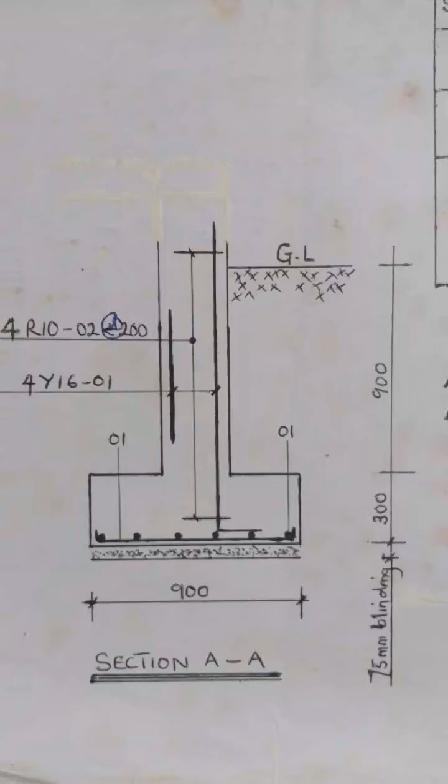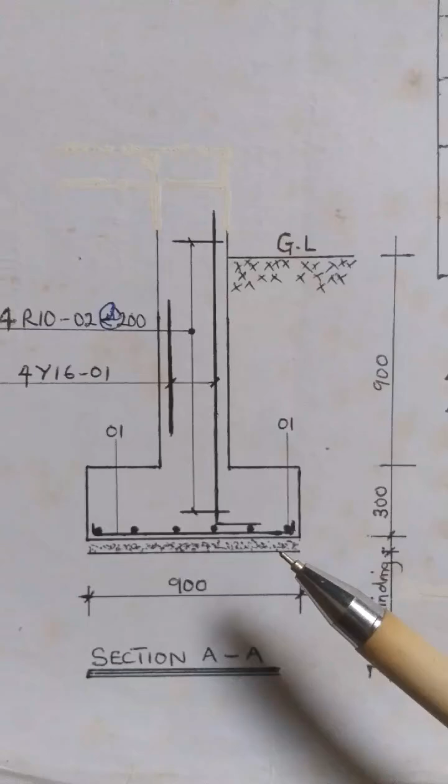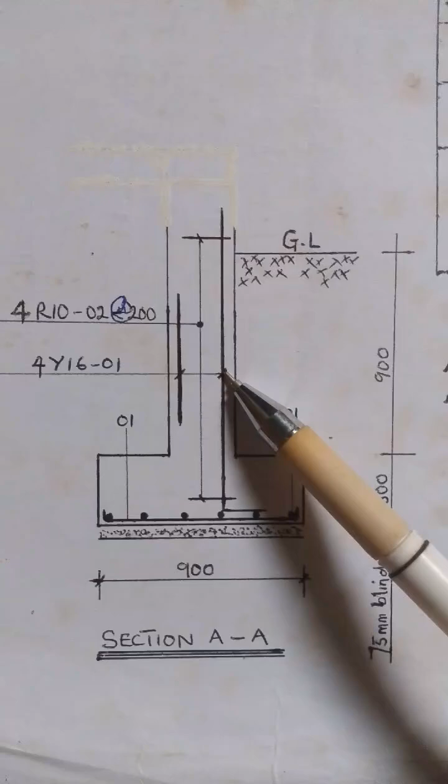We are still talking about the bar bending schedule. This is a typical section of a base, a column base. Now we have the base as 900. We talked about the base in the previous video, but today we are going to talk about the column. You can see that the column here is made up of four lengths. We have it this and this. You can see the indicator showing that this information is made for this and this. So that is what we are looking at today, for the column.

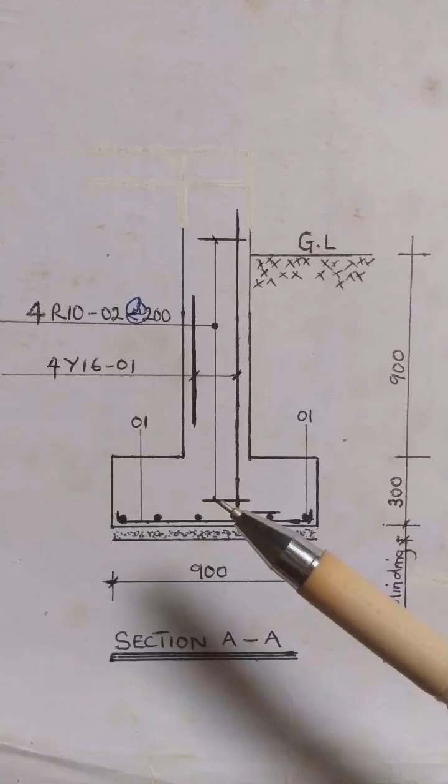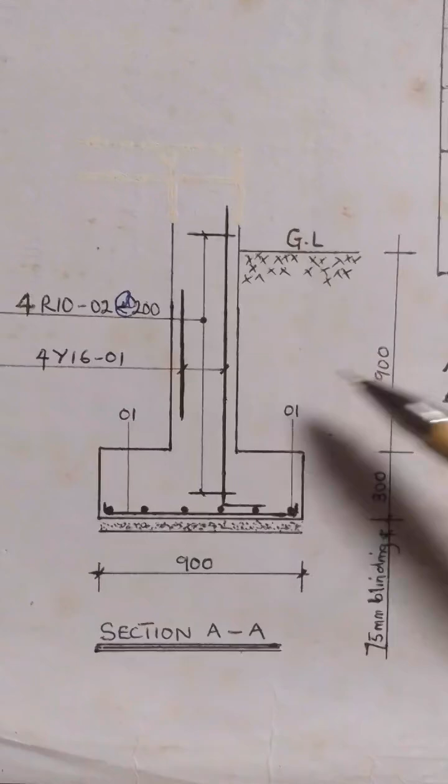Now the column also has stirrups. It is the stirrup that holds the main bars in place. The stirrup in this case is what we refer to as lateral ties. The lateral ties span from this point to this point. So from here we have four pieces of lateral ties that will span this length at 200 millimeter spacing.

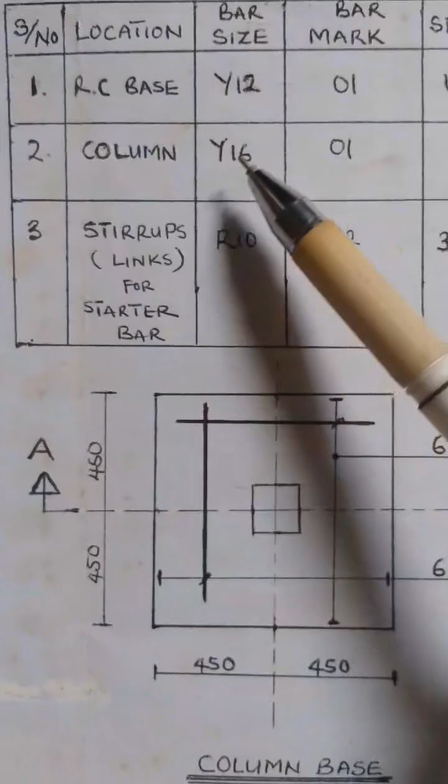So for the column now, we are looking at the main bar and the lateral ties. When you come to the schedule now, you have the column. We have the column as Y16, bar mark O1. We don't have spacing for the main bar. Then this is how the reinforcement looks like.

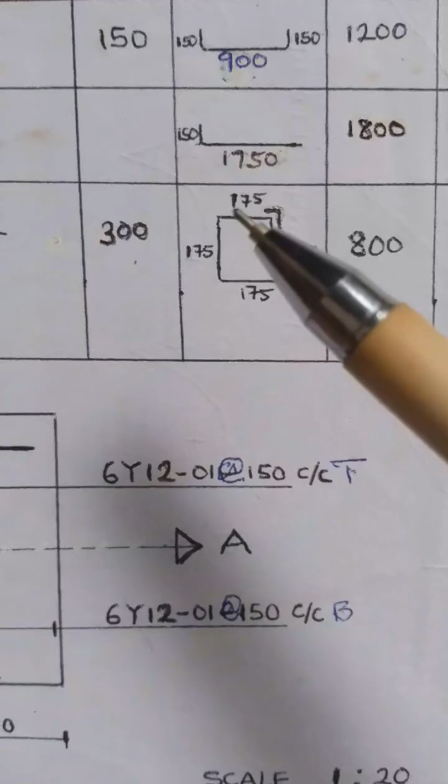From the total height of that base, we made some subtraction because of the reinforcement for the base. Then we arrive at 175. So that is what you are going to get from this point to this point.

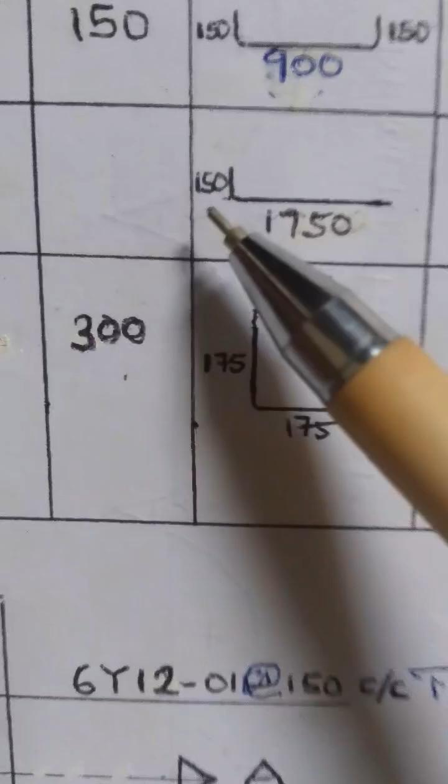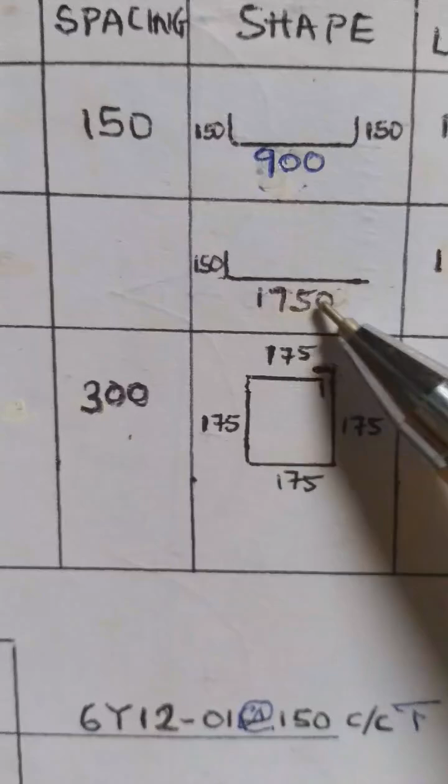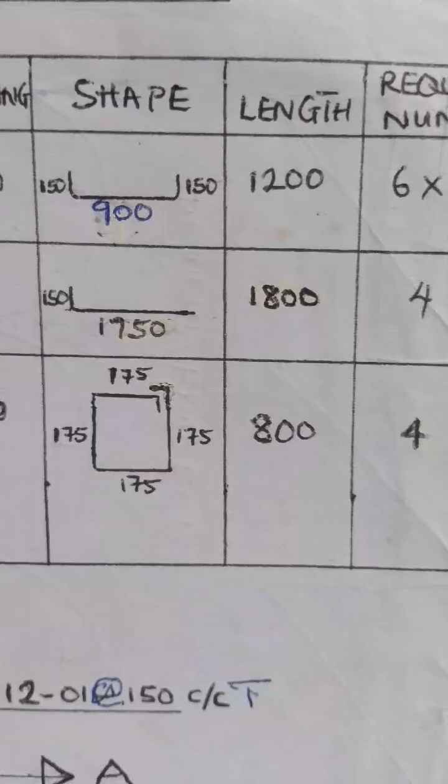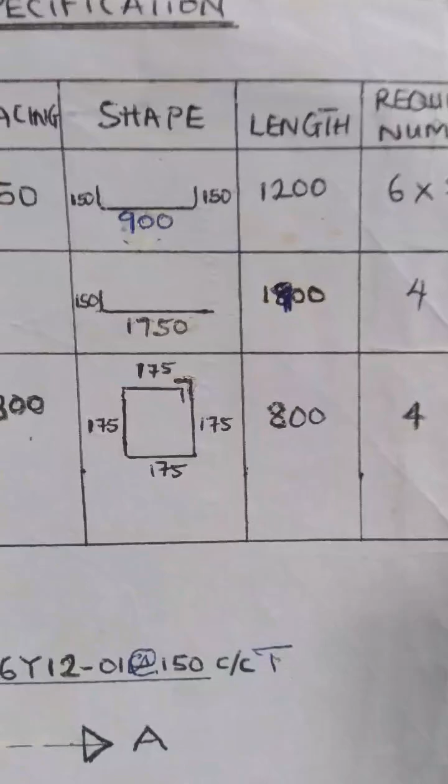Then you also have a 150 bend. In most cases we usually have up to 225 length of the legs, but in this case we are using 1750 plus 150. It will give you... this is supposed to be 1900. Okay, 1900. Then you are expected to have four lengths of it.

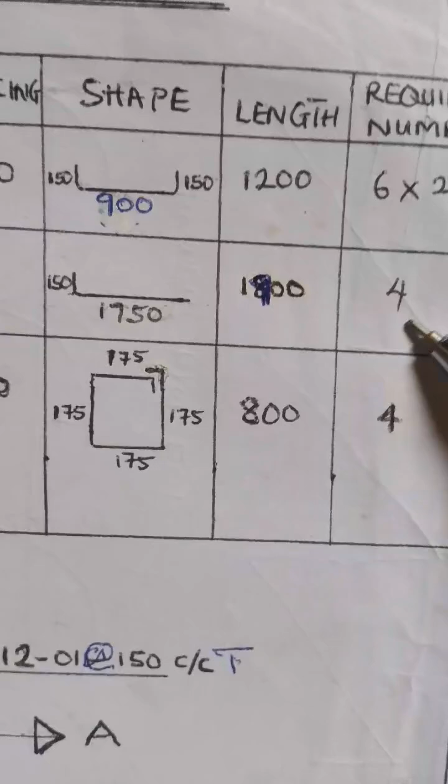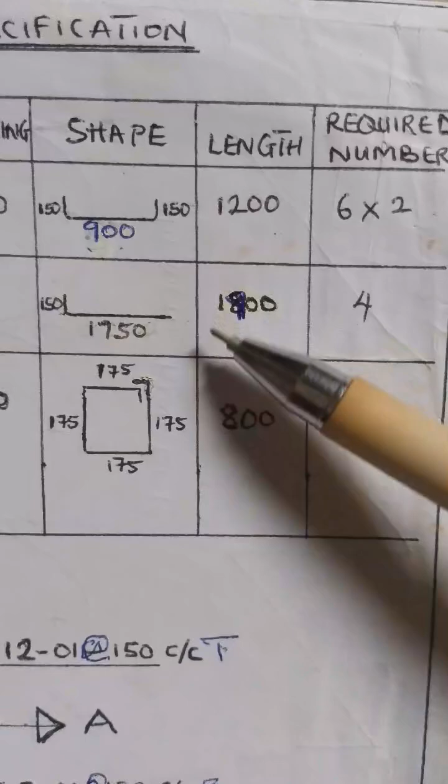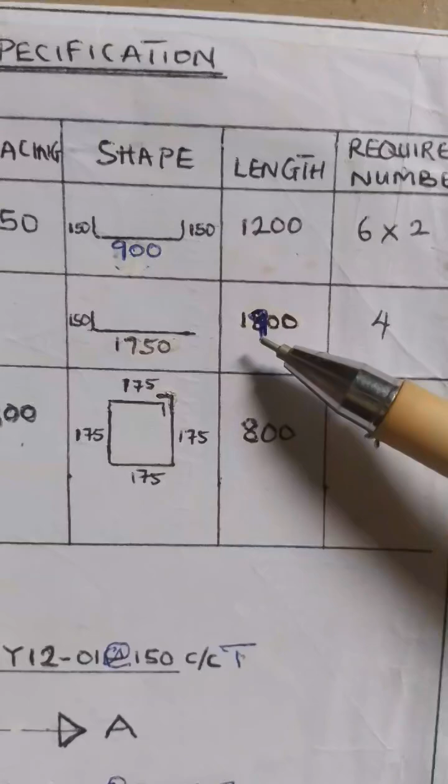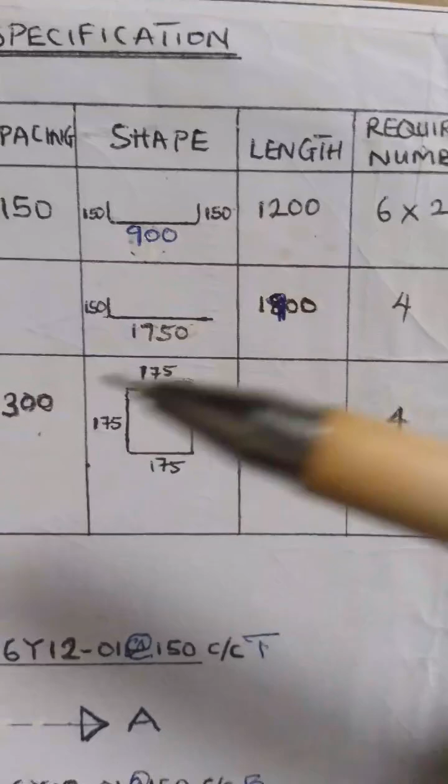That will make up that column, so you have four lengths of it. With this information, the iron bender will only get the reinforcement of Y12 and cut 1900 millimeter length into four. So that is what is expected to provide here before he will start bending, to bend this 150. This will actually aid the steel fitter on how to cut, the length to cut, and also the bend to be made. So that is for the column.

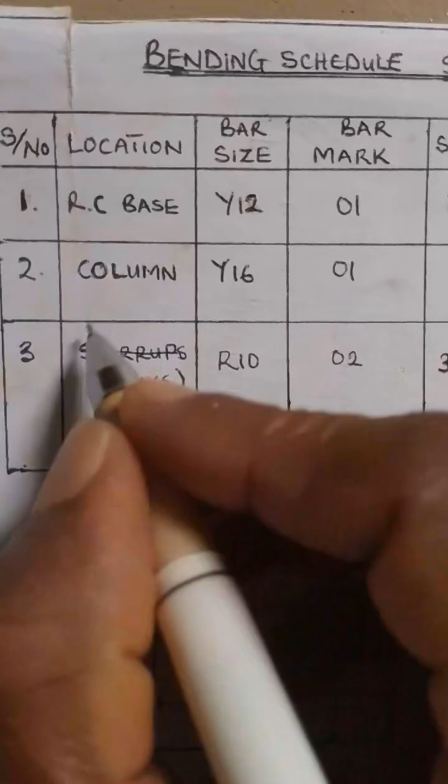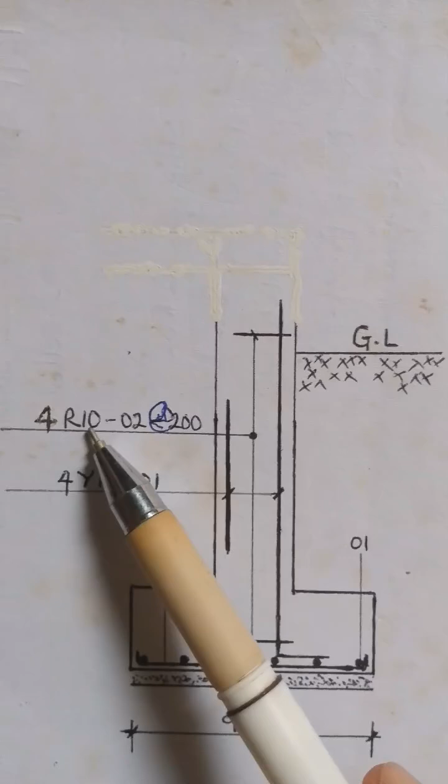Then we come to the links, the lateral ties. From the lateral ties now, we have 4 R10. Remember I told you this R is for mild steel, while the Y is for high yield steel. So the lateral ties, we are using mild steel. So 4 mild steel, diameter 10, O2 at 200. Why is it O2? Though they are all in the column, but of different size and of different length, so that is why the bar mark will change. The spacing is 200.

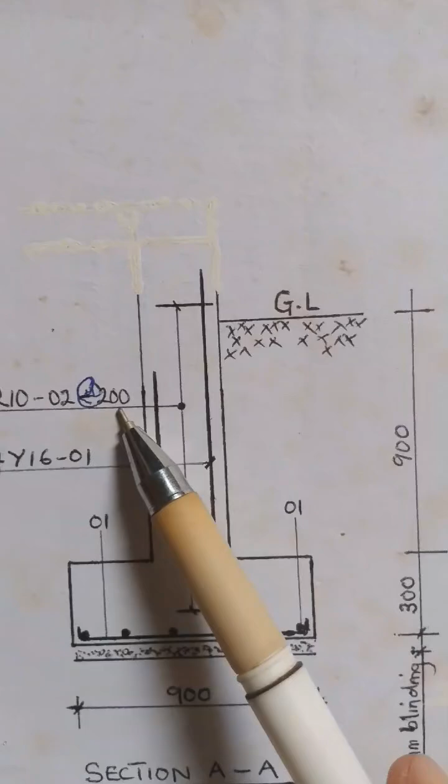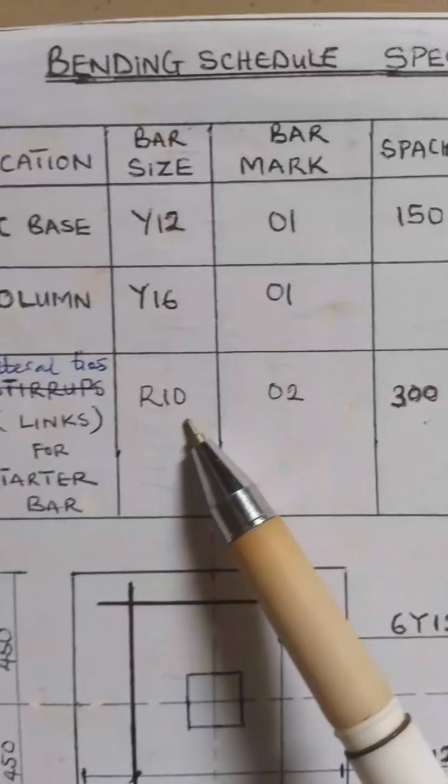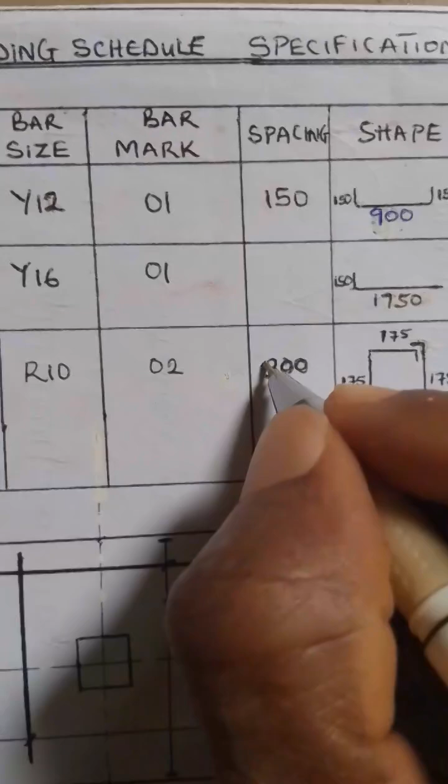So you come to the schedule. We have lateral ties here. The bar size is R10, the bar mark is O2, the spacing is 200. Then we have this length of the lateral ties.

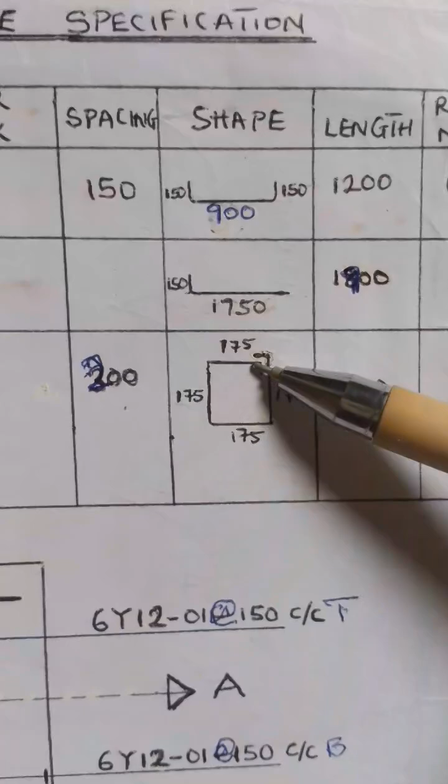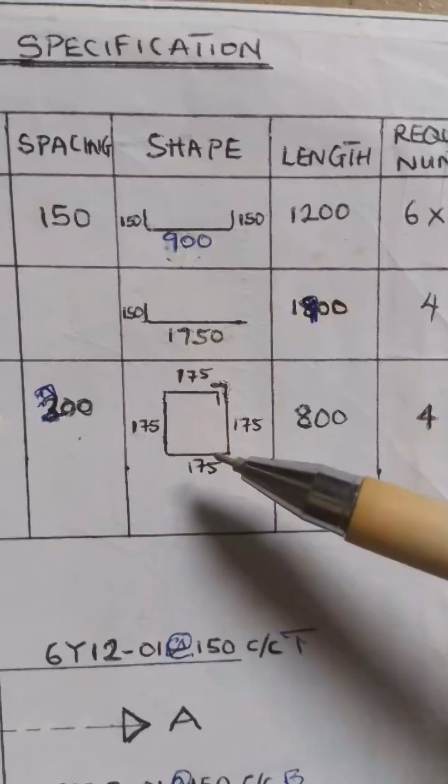So when you add up the four sides and also the bend, you have 800 as the overall length. So this 800 is what the steel fitter is expected to cut before it can now bend to get this shape. It's expected to produce 4 of it, which is this 4 here. So that is how we're expected to translate this information of our reinforcement into our bar bending schedule.

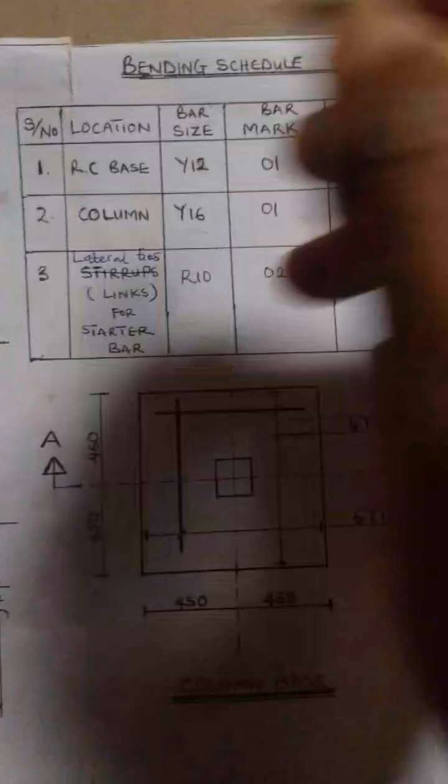Okay, this is bar bending schedule. All right, so at this point I'm going to stop here.